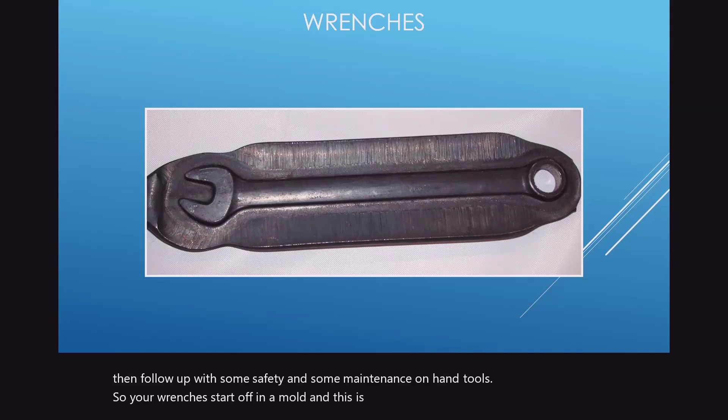So your wrenches start off in a mold, and this is a mold of a wrench right here. This wrench is not finished, it'll be going through the rest of the process, then it'll be chromed, and then it'll be sized and stamped in the size.

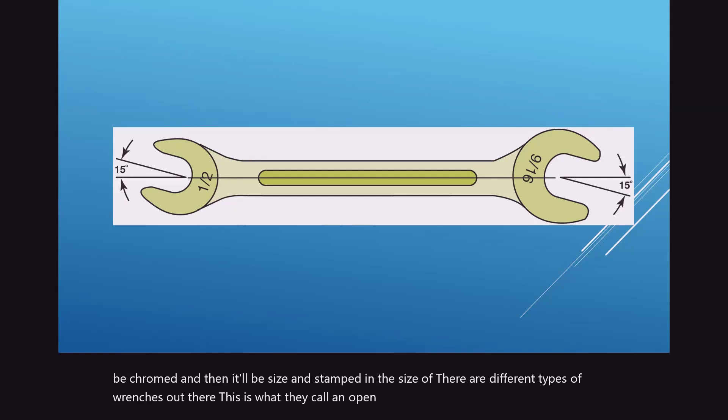There are different types of wrenches out there. This is what they call an open-end wrench. You'll notice it has a 15-degree angle to it. This angle makes it easier to actually fit on the bolt or the fastener, and then it gives a little bit more leverage for the technician.

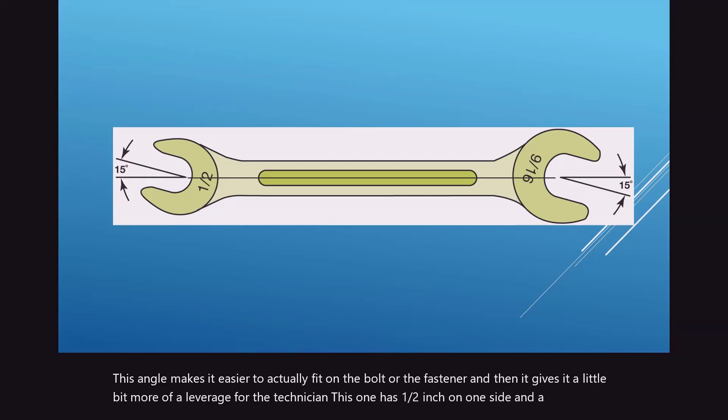This one has a 1/2 inch on one side and a 9/16 on the other side. This is very common on open-end wrenches, they'll have one size on one end and one size on the other.

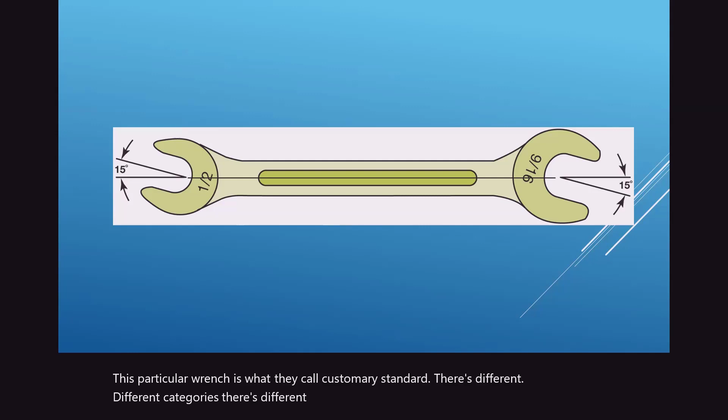Now, I do want to note that this particular wrench is what they call customary standard. There's different categories, there's different types of wrenches out there, and we could have metric or customary standard. There's some other different types of wrenches out there, different categories, but I won't go too deep into that because we're really going to focus on the automotive world.

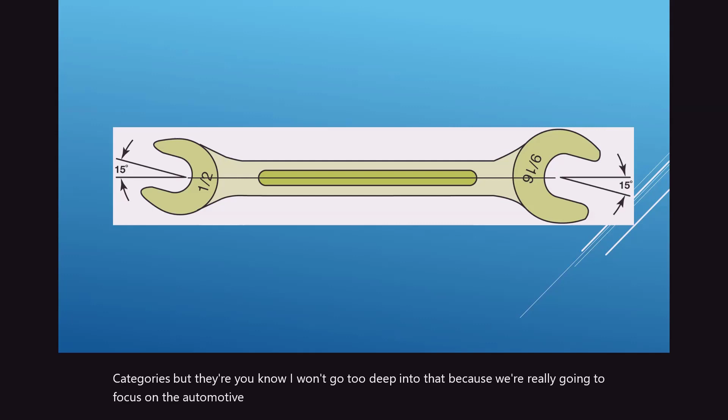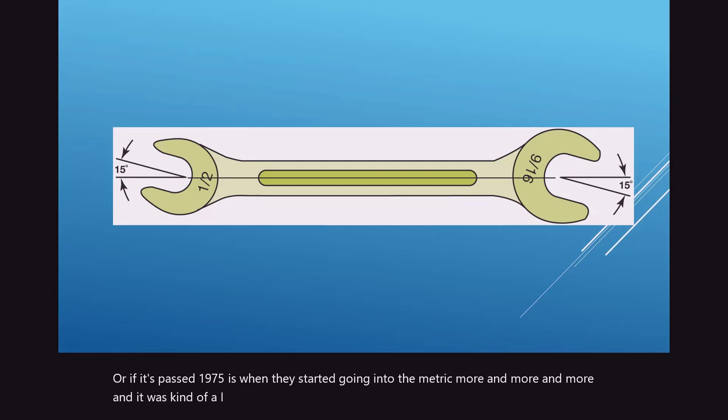And you'll find that most automotive pre-1975 is going to be in US customary standard, or if it's past 1975 is when they started going into the metric more and more. It wasn't so much a phase in, my toolbox actually has both in them, and you'll find some of the kits come with both sizes in them also.

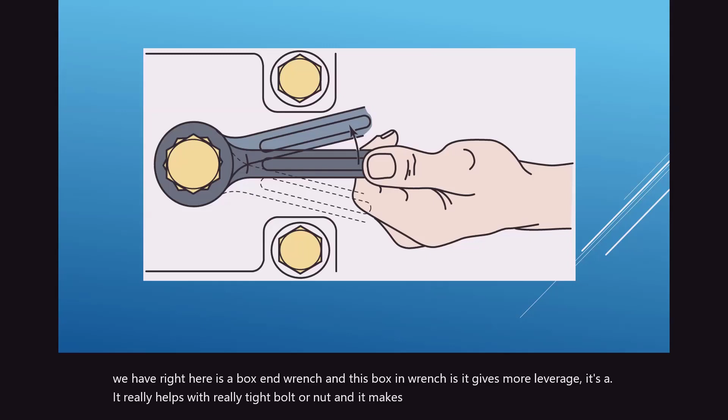But this is an open-end wrench. What we have right here is a box-end wrench, and this box-end wrench gives more leverage. It really helps with a really tight bolt or nut, and makes it easier for you to give a little bit of leverage on it too.

And like I said, this is a box-end, and then there's what they call a combination wrench. The combination wrench is very common, let's put it that way. You buy your kits with different sizes, and generally they'll have a box-end on one side and an open-end on the other side, and these will match in sizes. The open end will be like a 1/2 inch, and the box end will be a 1/2 inch.

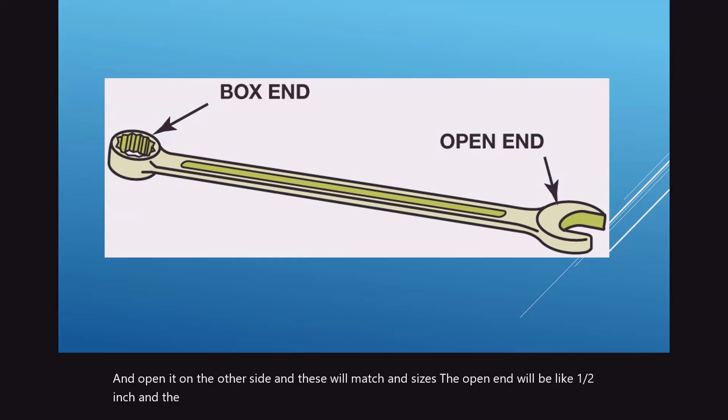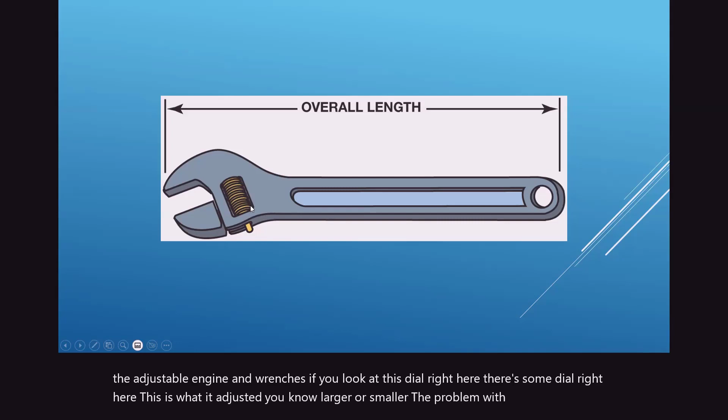Then you have your adjustable wrenches. The adjustable wrench is not really what I use that often, because if you look at this dial right here, this thumb dial, this is what adjusts it larger or smaller. The problem with adjustable wrenches is they can actually slip, and they can round over your different types of fasteners if you're trying to use them.

Generally, the only time I really use adjustable wrenches is when I gotta bend a piece of sheet metal, I'll use it that way. And that's pretty much most of what I use it for.

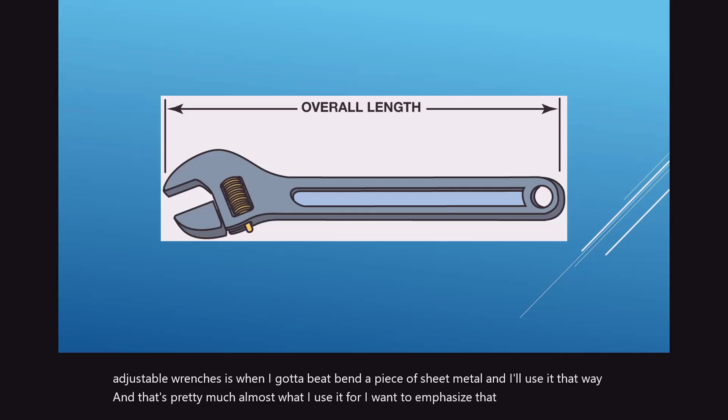I want to emphasize that you need to get the right type of tool for the work. If you try to shortcut, or try to adapt a tool to a job it's not meant for, this is going to either damage the work or the project you have, or it could actually get yourself hurt. So just be very careful when you're sizing up the tool for the work.

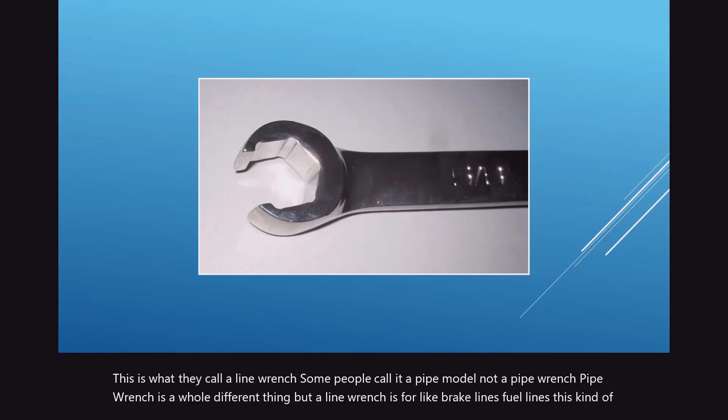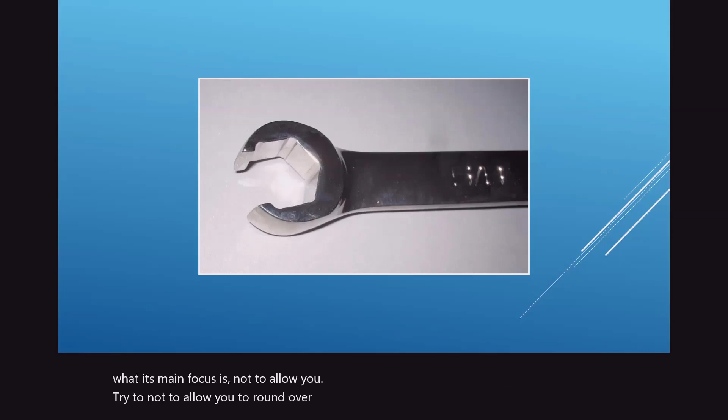This is what they call a line wrench. Some people call it a pipe wrench, well, not a pipe wrench - that's a whole different thing. A line wrench is for brake lines, fuel lines, power steering lines, this kind of stuff where you have a tubing fitting going into a connector, and you want to put a lot of force onto it, but you don't want to round it over. So that's its main focus, not to allow you to round over that fitting. So this is what they call a line wrench.

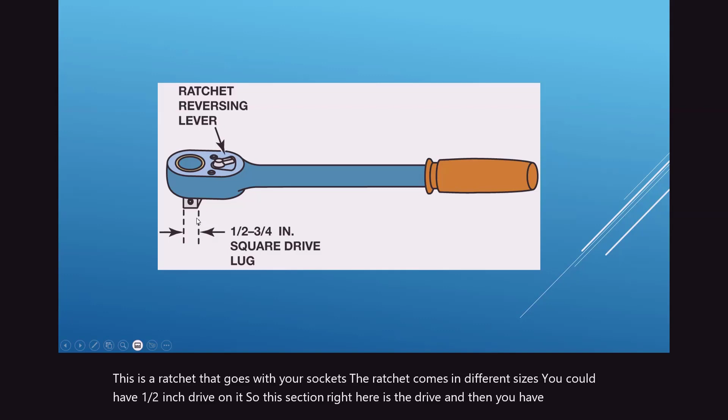This is a ratchet that goes with your sockets. The ratchet comes in different sizes - you could have a 1/2 inch drive on it. So this section right here is the drive, and then you have the socket that connects to it, and the socket will have different output sizes on it too.

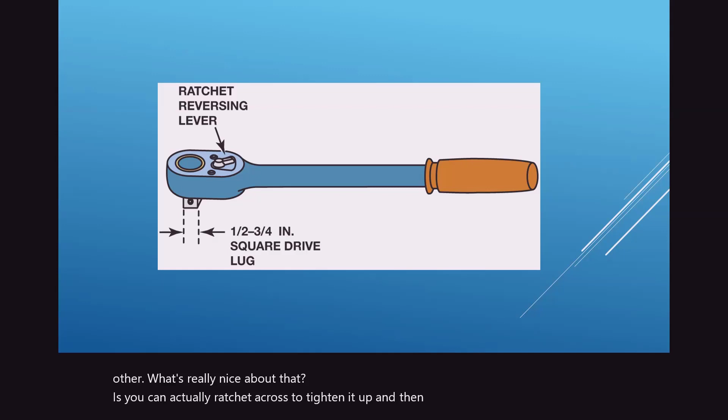This ratchet is directional, so you can change it to where it goes in one direction or the other. What's really nice is you can ratchet it across to tighten it up, and get a little more, so it gives you a little bit of playroom to go through, and you don't have to change like you would a wrench - bring it up, put it in another direction, bring it up, go into another direction. So it makes it a lot nicer and convenient.

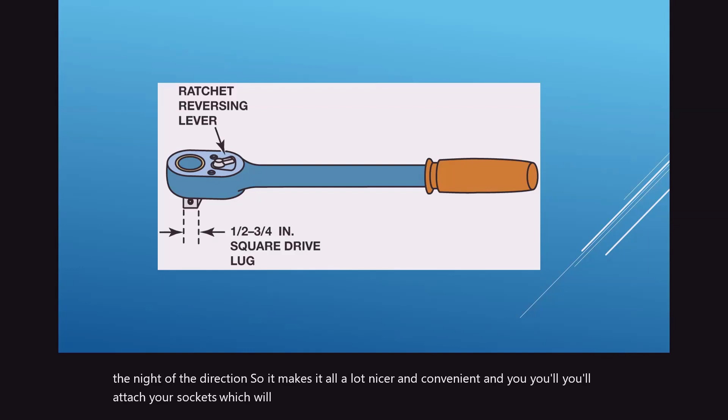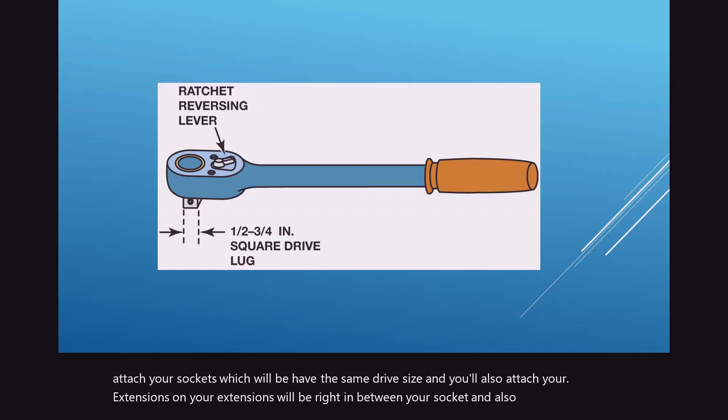You'll attach your sockets, which will have the same drive size, and you'll also attach your extensions. Your extensions will be right in between your socket and your drive of your ratchet. You could buy the extensions, and sometimes they come in kits with a couple different sizes. You can get really long extensions too - I have one that's almost as tall as I am, from when I was doing a lot of transmission work at one time.

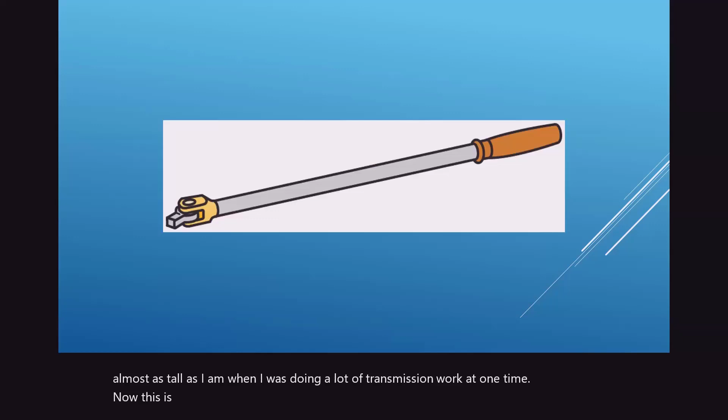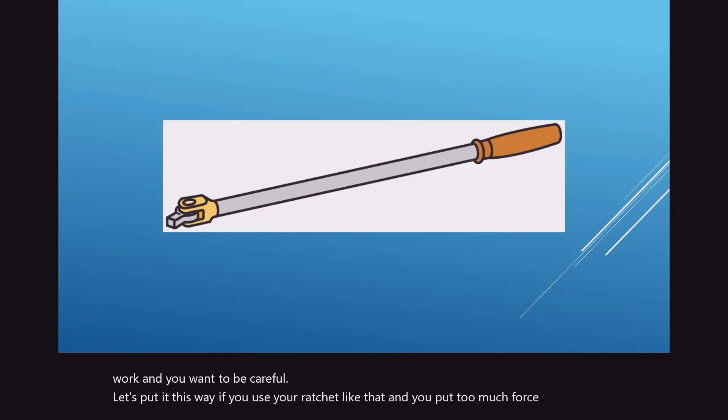Now, this is a flex bar, or sometimes we'll call it a breaker bar. This is really good for really tight work. You want to be careful - if you use your ratchet on something really tight and put too much force on it, you could damage the little gear inside the ratchet, and then you have to replace it or repair it. So it's best, when it's really, really tight, to get yourself a flex bar or breaker bar to do it that way.

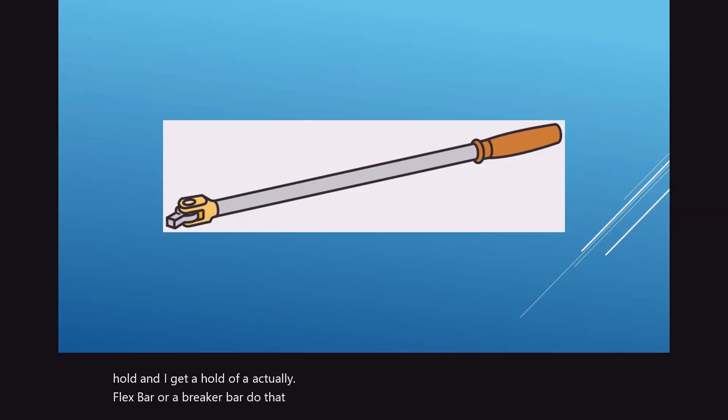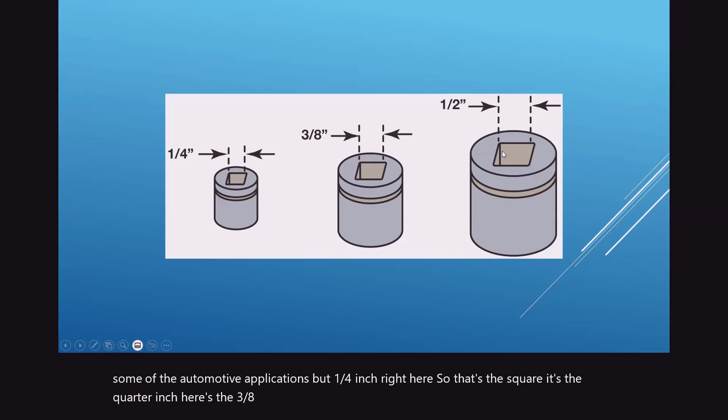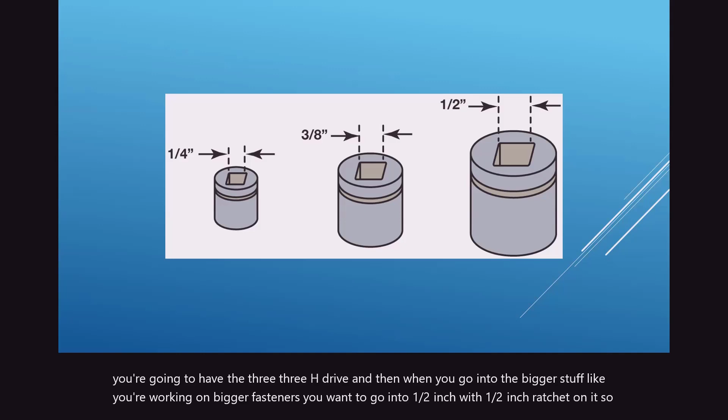There's different sizes of socket drives, and this is a good example. Some common sizes - they don't have the 3/4 here, which you might use on some automotive applications. But here's a 1/4 inch, the square drive, here's a 3/8, and here's a 1/2 inch. Your 1/4 inch is going to be for your lighter stuff. The most common, used for almost everything hand-wise, is the 3/8 drive. And when you get into bigger fasteners, you want to go with a 1/2 inch ratchet. So each size has its own little ratchet you could use.

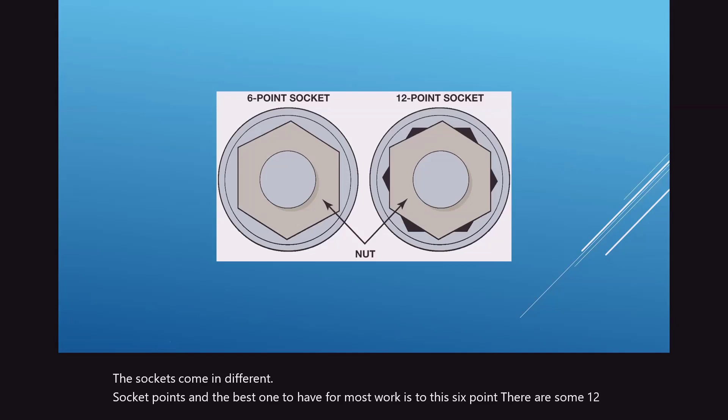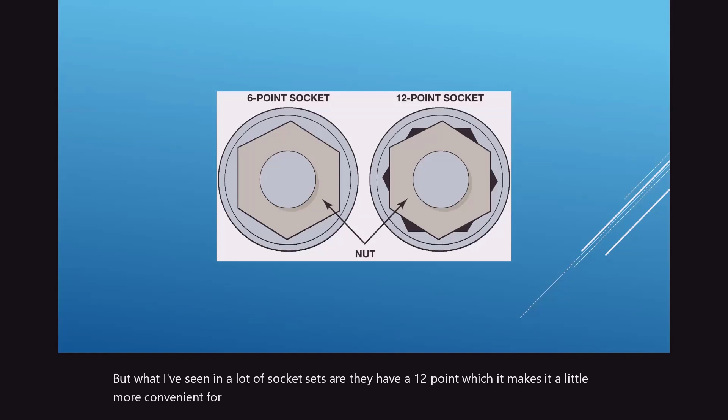The sockets come in different socket points, and the best one to have for most work is the 6 point. There are some 12 point applications - some exhaust manifold bolts, some intake manifold bolts, would require a 12 point. Most socket sets I've seen have a 12 point, which makes it more convenient for them to stamp out, whereas you almost have to go find the 6 point sockets. But if you have something really tight, be careful using a 12 point socket, because it can possibly round over. If you get a little wear on that bolt or nut, it may round it over when you put a lot of pressure on it. So just be careful with it.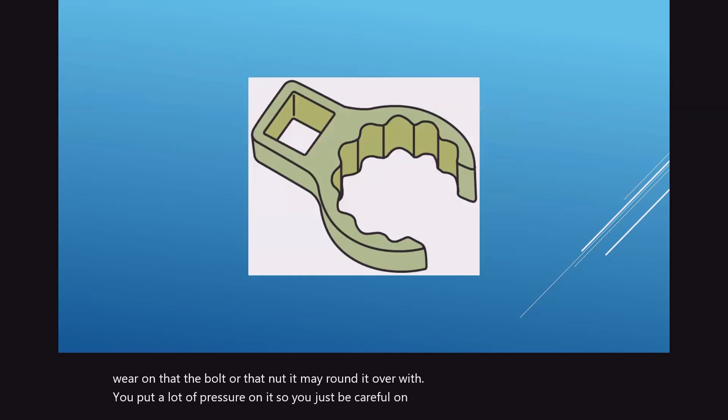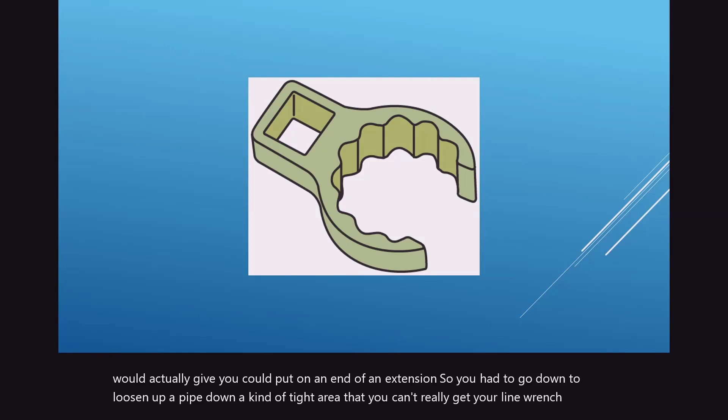And then there's also the crow's foot. This is similar to your line wrench, but it can actually be put on the end of an extension. Say you had to go down to loosen up a pipe in a tight area that you can't really get your line wrench into - you can take your crow's foot with a long extension and go down and loosen it up that way. So that's another possibility too.

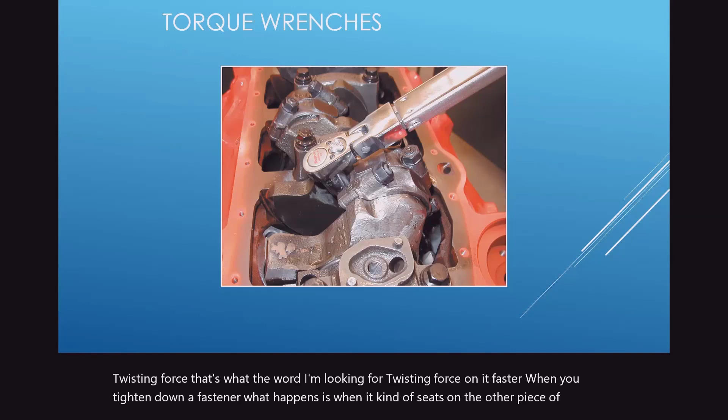Now, on torque wrenches - these are the devices you're actually going to use to make sure the fastener has enough torque, which sounds funny, but it means enough twisting force on a fastener. When you tighten down a fastener, what happens is it seats on the other piece of work - you're pushing things together and holding things together, putting friction force on the surface, and you're stretching the threads on that bolt or stud to give it enough tension that it's going to stay in place.

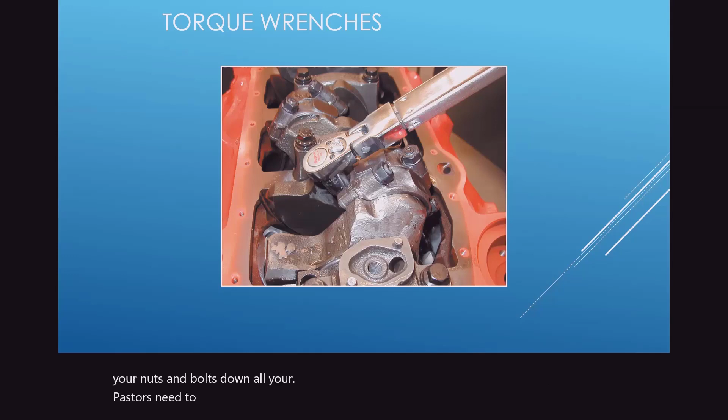If you use a ratchet just to tighten it down that way, you really don't know how much force you have on it, how much torque. So you need to get accustomed to using a torque wrench to actually tighten all your nuts and bolts down. All your fasteners need to be torqued down.

There's a torque for every fastener on a vehicle, engine-wise and all. There are different types of torque wrenches: the clicker type, which is in the picture you have right here, a beam type, and also a dial type. I don't have a picture right now of an actual digital type one.

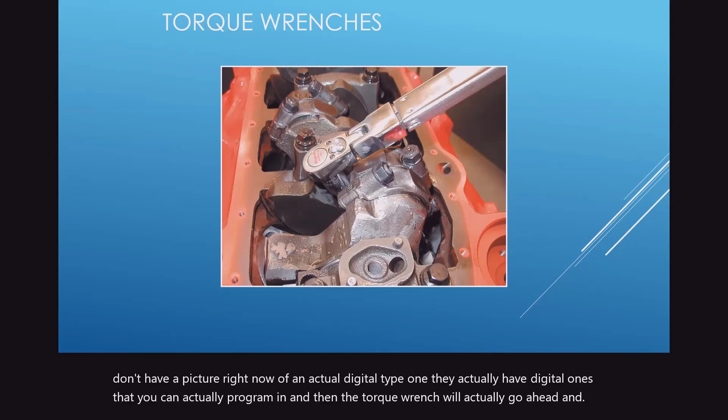They actually have digital ones that you can program in, and then the torque wrench will vibrate and beep at you when you get to that force, which is really nice when you're getting to some areas that you can't really see that well. But you want to be very careful when using a torque wrench, because there's some care you need to do with it. The way the clicker type works is there's either a flip lever or a lock to where you'll unlock the torque wrench, and then you'll dial it down to the specified torque you want. The torque can be in foot-pounds or pound-feet, or it could be in metric measurements too.

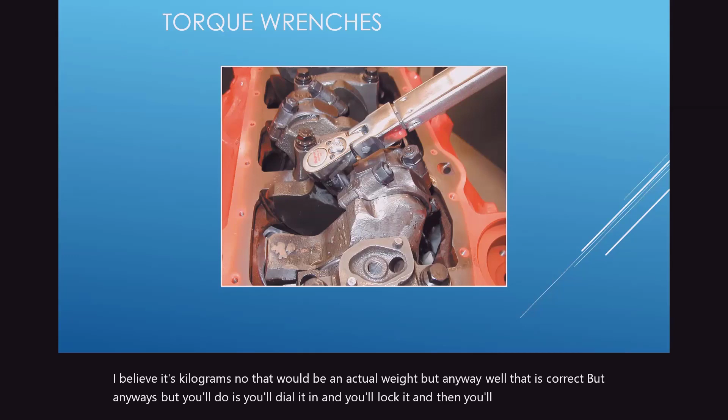So you've got the two sides. A lot of torque wrenches will have both on it, one side is the standard, and the other is in meters, or I believe it's kilograms. No, that would be an actual weight, but anyway, that is correct. What you'll do is dial it in and lock it, then run it down to that specific torque, and it's going to click. When it clicks, that means I'm at that actual twisting force and I'm good to go. You'll go around through all your nuts and bolts as you do it that way too.

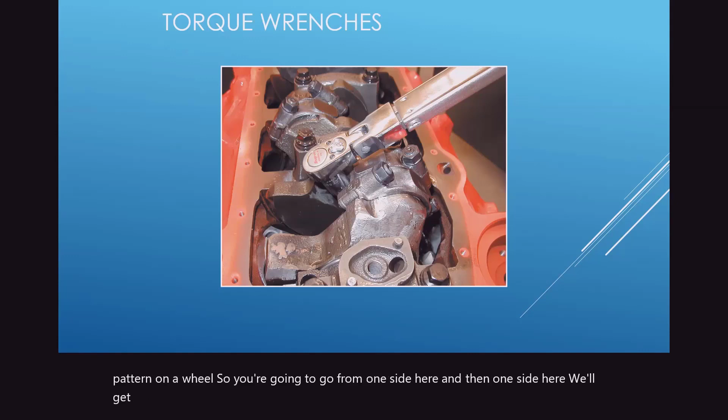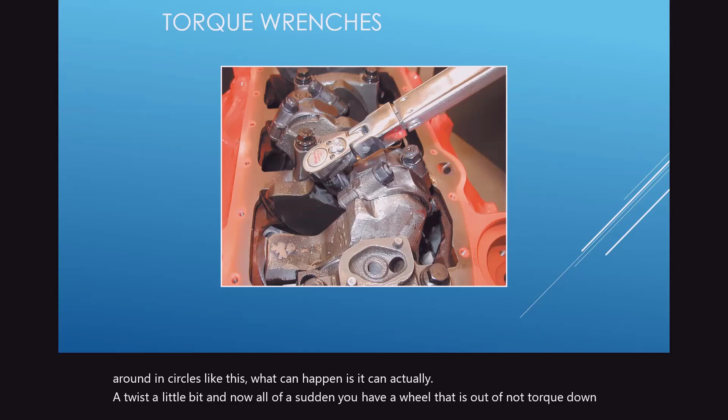Now, if you're torquing down a wheel on a car, or head bolts, or any kind of bolts you're going to be torquing down, you want to make this a habit: go in a crisscross pattern. So you're going to go from one side here, then one side here - we'll get more into this when we go into wheels and tires - but you want to go across, cross, cross that way, so it pulls down the wheel nice and straight. If you just go all the way around in circles, what can happen is it can actually twist a little bit, and now you have a wheel that's not torqued down evenly, and there's all kinds of nasty things that could happen - it could possibly have the wheel come off.

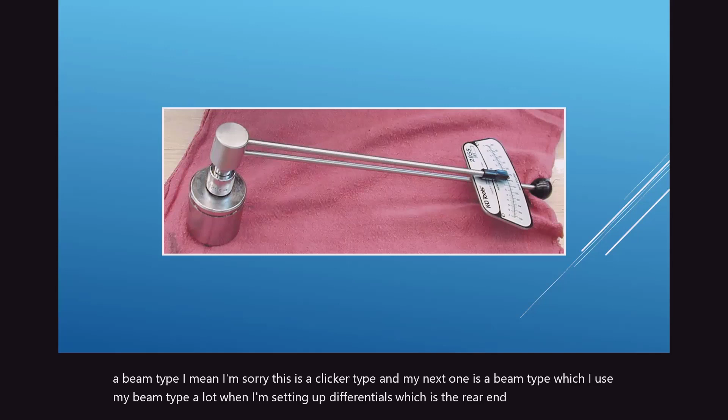So yeah, this is a beam type, this is a clicker type, and my next one is a beam type, which I use a lot when I'm setting up differentials, which is the rear end, the drive end of the actual differential. I use this beam type because it's very, very sensitive. When you start pulling on the handle on the end here, this starts to flex, so it actually shows you what your torque is, and it's very, very sensitive. This is what I normally use when I'm doing that.

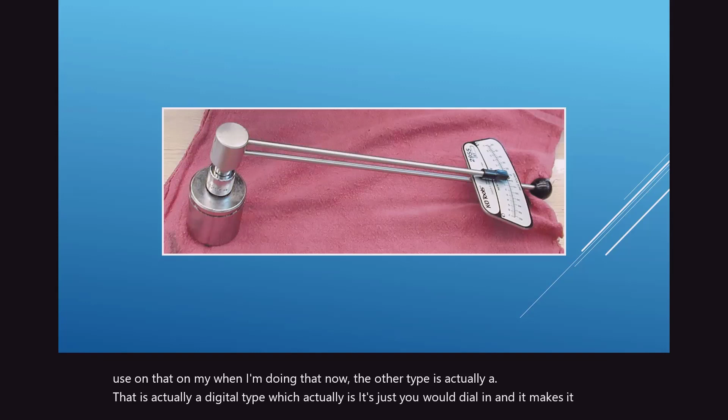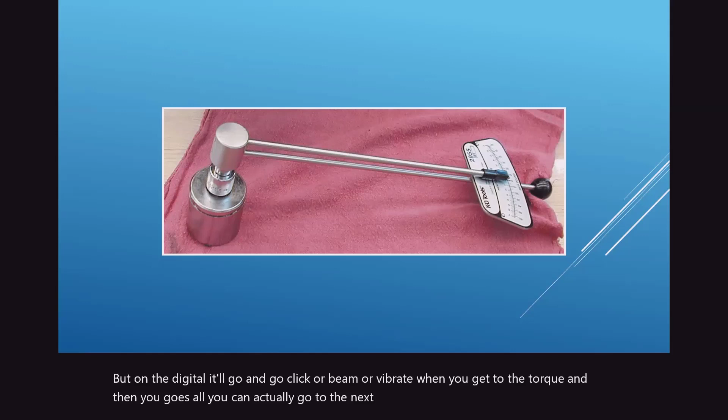Now, the other type is actually a digital type, which you would just dial in, and it makes it really nice. Like I said before, sometimes on some sequence of torquing things down, they'll say torque it down to 45 foot-pounds and then add 60 degrees. Unless you have a degree wheel with it too, that's kind of hard to do. But on the digital, it'll click or beam or vibrate when you get to the torque, and then you can go to the next stage of torquing it down to the degree. So it makes it kind of nice that it's all in one type thing.

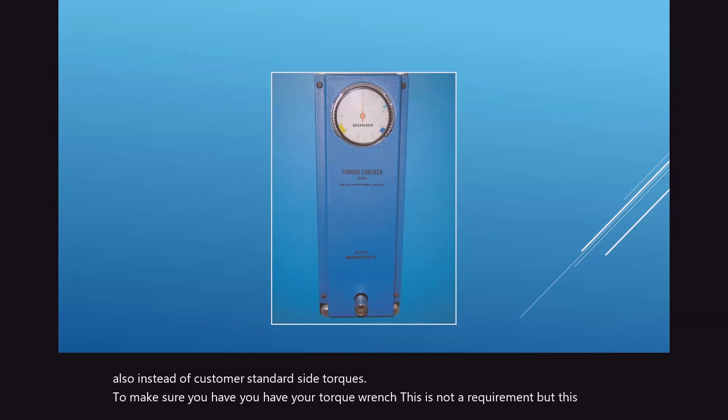And again, those will come in metric and also in customary standard side torques. To make sure you have your torque wrench - this is not a requirement, but this is how we can check to see if the torque of my wrench is accurate. After a period of time, torque wrenches can come out of accuracy, and what you'll either do is, if you have one of these torque checkers, you can actually check it. But when it comes to repair, a lot of times we have to send them in.

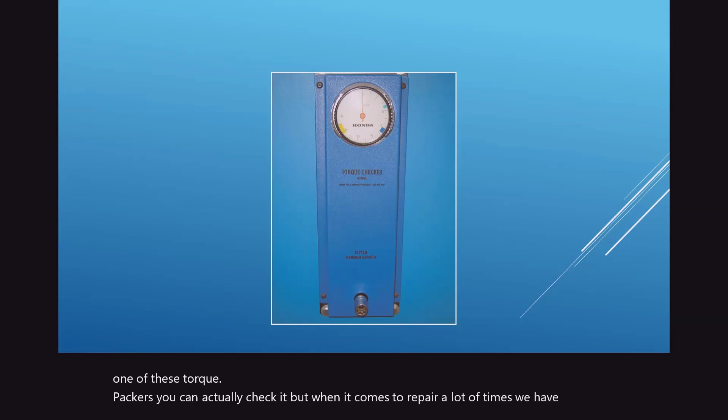My recommendation is don't get the torque checker, or if you do, have it bolted up on a wall someplace so every once in a while you can go by and check the torque on your wrench. And then if it's out of torque, you can send it in to have it repaired.

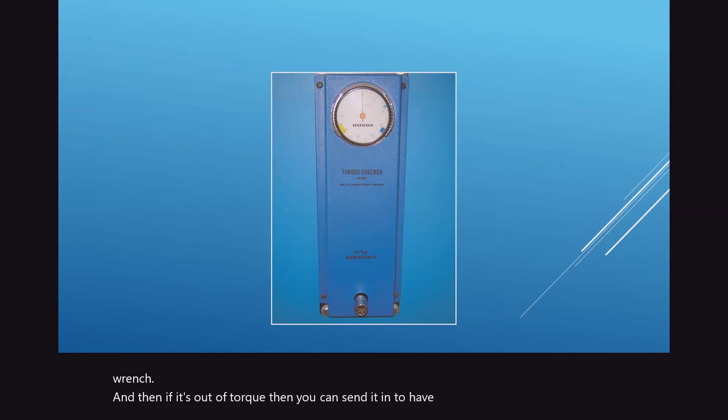A lot of your tool manufacturers will do it, and there are different areas you can actually send in equipment to have it checked or repaired, and checked and repaired to make sure you keep it up to date.

It really depends on how often you use your torque wrench, but my recommendation is to make sure you send it in like once a year. You may want to send it earlier if you use it a lot. You may not, but I would still say a minimum of once a year.

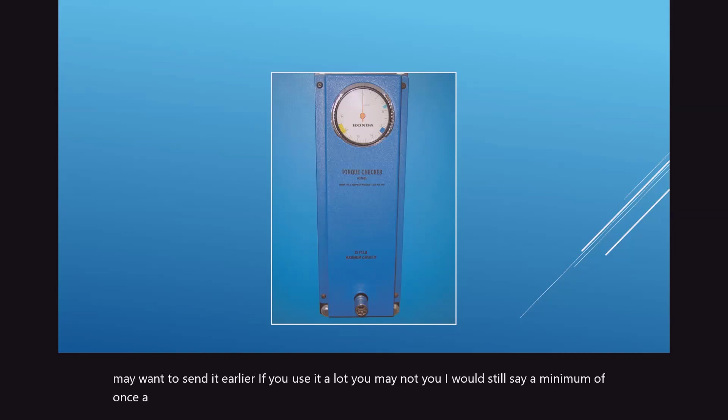The other thing I wanted to point out about torque wrenches is you want to make sure you put them in a rest position. I even do it on the digital ones too. But when you're through using the torque wrench, like on your clicker type, and sometimes they call them dial types too, you want to make sure you bring everything down to the 0 mark.

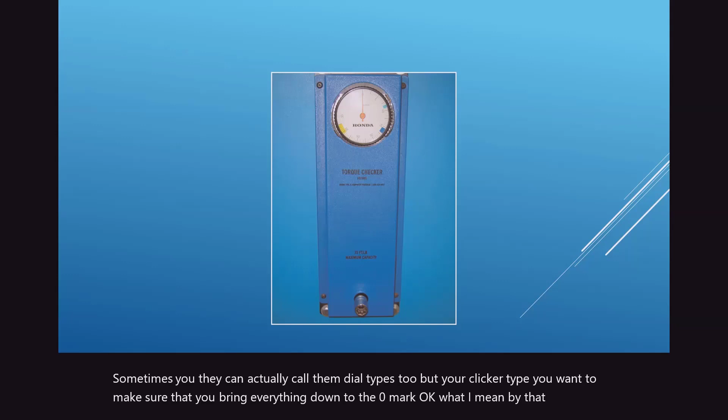What I mean is, on your clicker type, you're going to dial them into a torque setting and lock it in place, and then do your torquing. Well, after you're done torquing things down, take the time to unlock it and bring it back down to 0 again, or as close to 0 as you can.

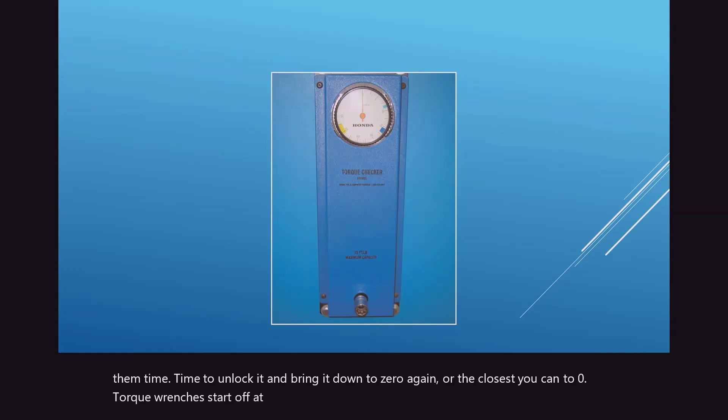Some torque wrenches start off at like 25 foot-pounds. If you get into the inch-pound ones too, because they have those out there as well, you want to also bring them down to as close to 0 as possible.

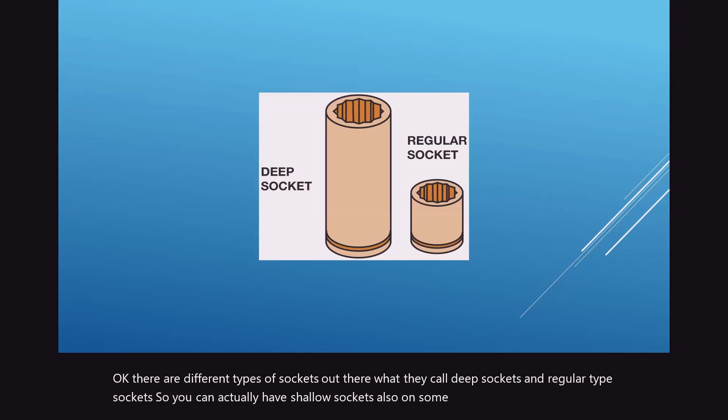There are different types of sockets out there—what they call deep sockets and regular type sockets. You can also have shallow sockets. Some tool manufacturers will sell all kinds of different depths of sockets, and depending on what kind of work you're doing, if you need to get down into a threaded area where the nut is all the way down inside, you may have to have a deeper socket to get it out.

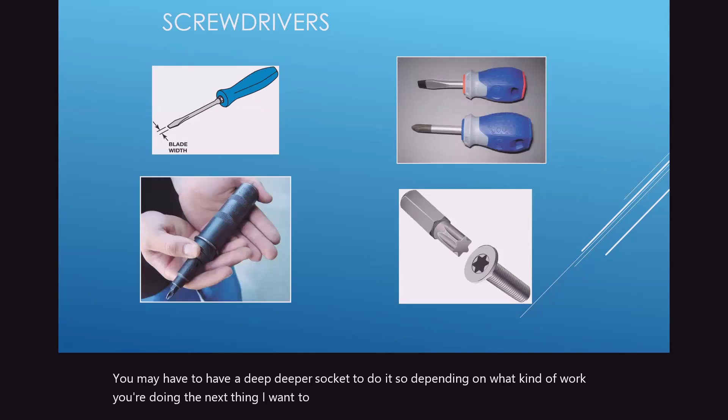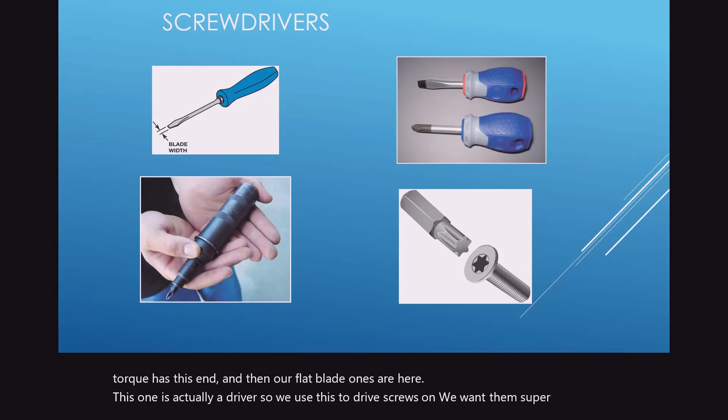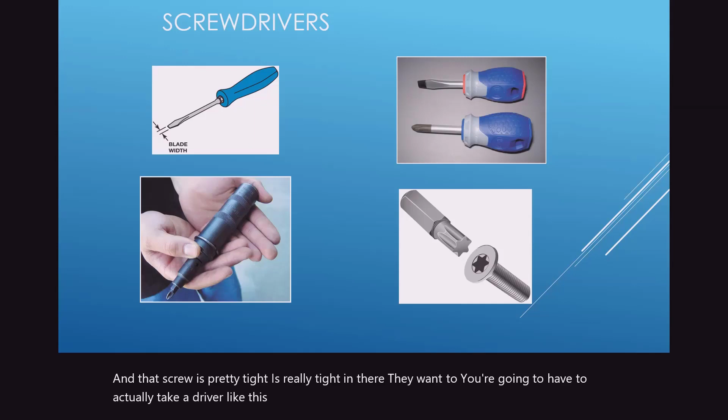We use this to drive screws when we want them super tight and can't do it with our hands, or we may use the driver to loosen some of your drum brake systems. They had a set screw from the factory to keep it in place during assembly, and that screw is pretty tight—really tight in there. You're going to have to use a driver like this because you may not have enough twisting force in your wrist to bring it out.

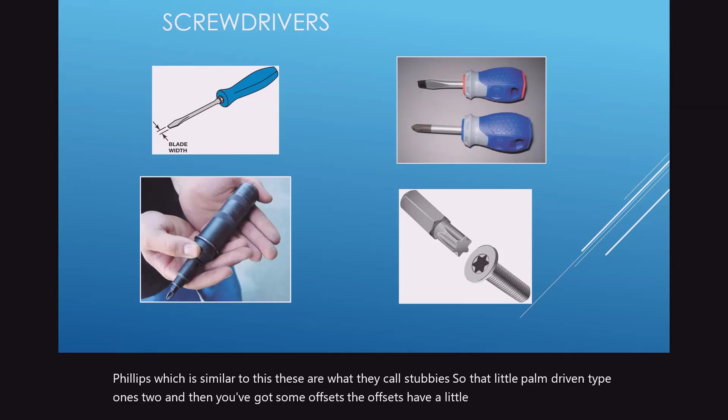But these are some of the most common ones—your flats, your Phillips, which is similar to this. These are what they call stubbies, a little palm-driven type too. And then you've got some offsets. The offsets have a bit of an angle to them so you can get into really tight spots. And then, of course, our torx.

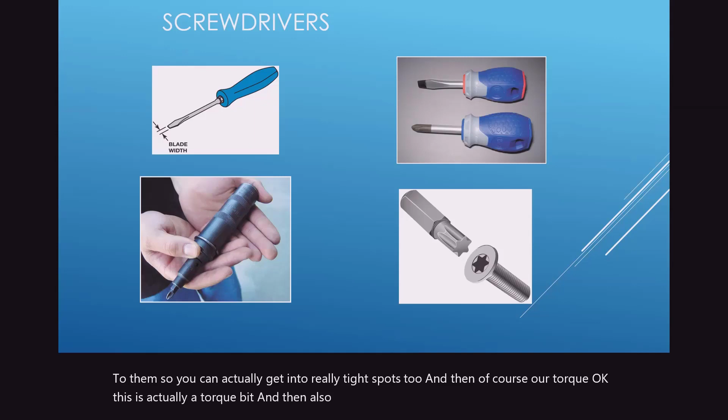This is actually a torx bit, and then also our impact. The torx can come in different sizes, and they call them like T45s, T25s, and so on to get into the size that they need.

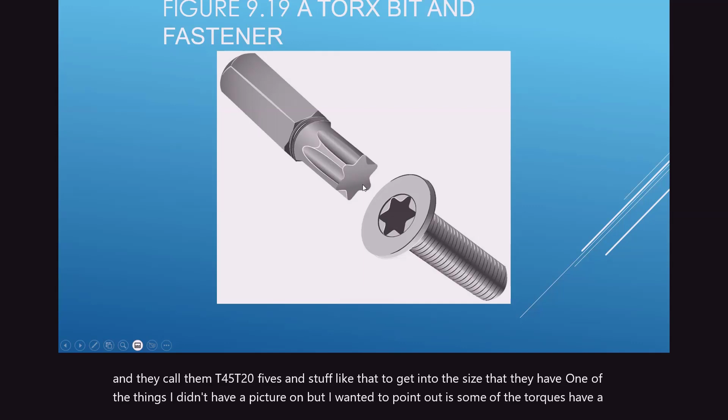One thing I didn't have a picture of but wanted to point out is that some of the torx bits have a hole in the center—these are considered security torx. Early on, it wasn't as available to the general public; they would only sell them to certain people. Now it's pretty much standard that most technicians will have them.

When you're through with that project, just take your time to wipe it down, maybe with a little bit of cleaning solution to make sure it stays nice and greaseless like that.

And then we have our mallets. These are great for a kind of soft installation, you don't want to damage anything very much. There's also brass hammers out there. Brass hammers are good for metals that are soft, and you don't want to damage the metal too much.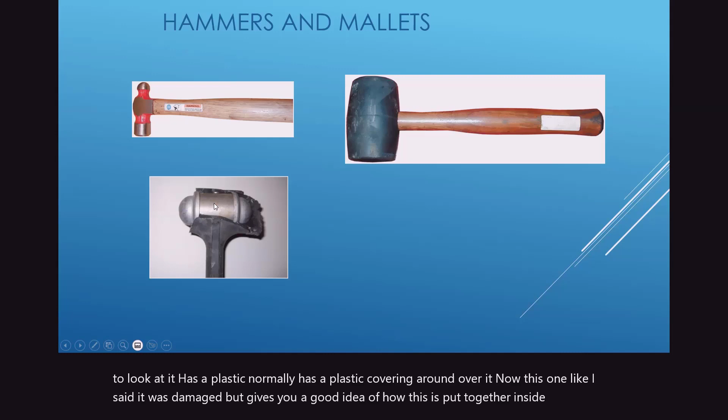Inside here is shot, like little ball bearings, and this is actually in there on purpose. So on a regular hammer, when you hit something metal, it will actually bounce a little bit. With the dead blow hammer, that shot migrates over to the spot you're actually driving to, which keeps it from bouncing as much. So that's why they call it a dead blow hammer.

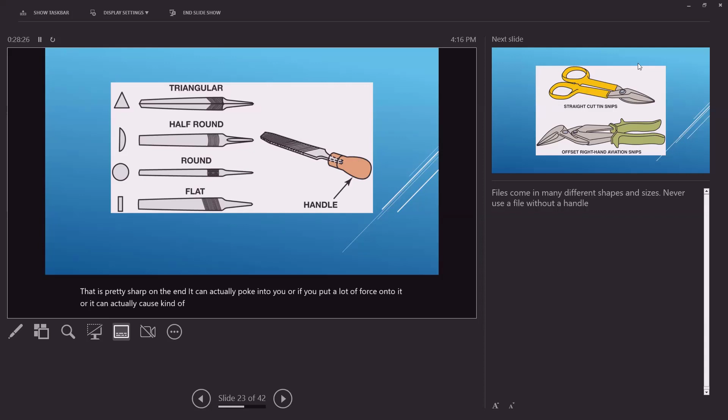The other one I wanted to get into is cutters, different types of cutters. These are what they call tin snips. They cut different thin tin or thin metals, or they may be called aviation snips. They can have a right hand, a left hand, or a center aviation snips. So we have different types for doing different kinds of cutting work.

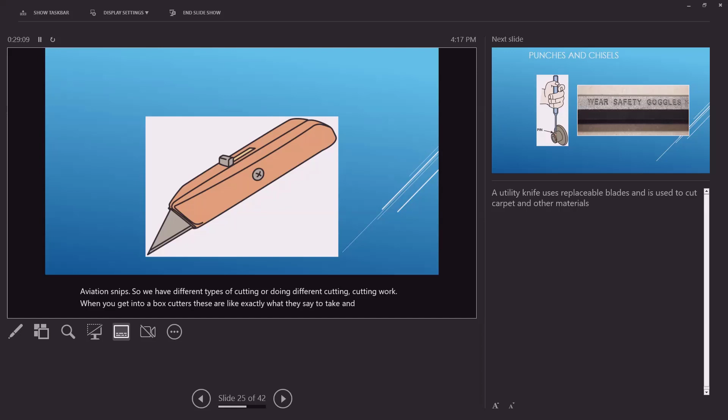When you get into box cutters, these are exactly what they say they are, used to cut boxes. A lot of people use them for cutting carpet or opening a package. Sometimes they're called utility knives. They have replaceable blades, but again, they're only used for light type work.

Your punches and chisels - this is showing an actual punch right here, and we're driving a pin out. You can use one to drive a pin in or out. You also have chisels to actually cut a piece of work. It looks similar to a punch, but has a kind of blade on the end, so you can drive out certain things or cut certain things off.

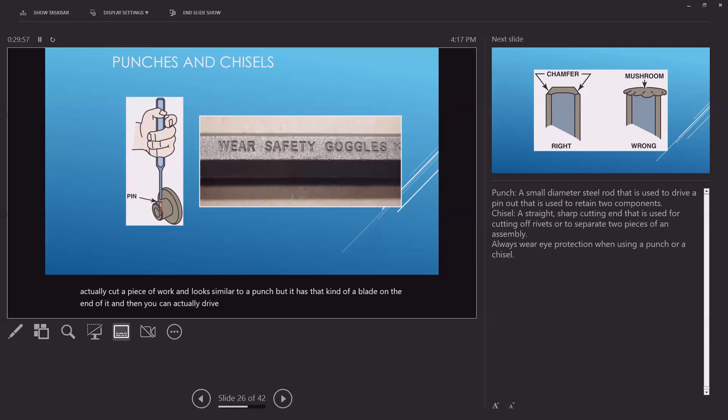The one thing I wanted to bring to your attention is that after a period of time with a punch or chisel, the actual top of it is going to start mushrooming over. It's just a matter of time when it does that. You want to always wear safety glasses when using punches, chisels, and all your tools. What can happen is it mushrooms over and you need to clean up the chamfer on it - in other words, get it back to the angle. Some of your chisels and punches come with a little gauge so you know exactly what angle is best for that punch or chisel.

Then there's also stud removers - this is a stud remover right here, one style. There are other styles that grip a different way, but you can put it on an extension or your ratchet, and this little piece here goes in and grips onto that stud so you can pull the stud out. So you just put it down the hole, and when you start twisting, it starts pulling and locks in place so you can pull that stud out.

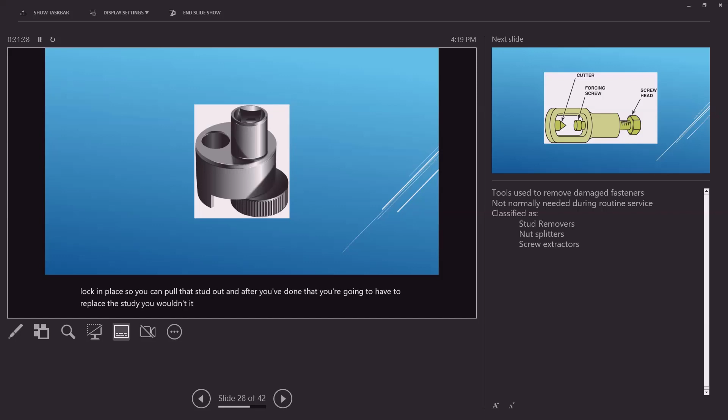After you've done that, you're going to have to replace the stud. It wouldn't be smart to use that stud over again.

All right, and then we have nut splitters - this is a nut splitter. Basically what you're going to do is put it up against the nut, usually because the nut's rounded over and you can't get a good grip on it. So you actually set up this tool so it tightens down to where it splits the nut itself.

The other tool I want to bring up is extractors. This is one style - there are other styles out there, but this one is pretty common. Basically, when you get to the point where that stud has been broken off, maybe even flush or under flush, you're going to have to drill - this takes a lot of skill - you drill center into the actual stud, and then use one of these extractors. You drive the extractor in, and it has a twist to it, so it twists its way out. There's a special tool that goes right on top here that connects so you can get it out fairly easily. It's just a matter of how bad that is.

You may end up having to drill it out and retapping - in other words, cutting new threads on the actual piece of work you're working on.

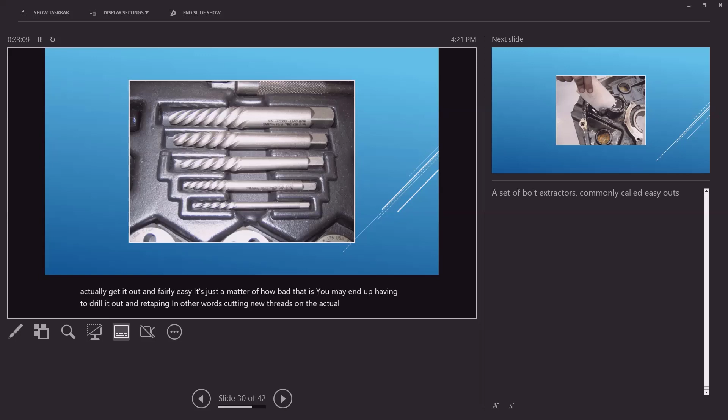Hopefully not. And then, of course, when you're looking at engines, you actually have some plugs that go into what are called casting plugs. Some people call them freeze plug holes, but they're actually casting plugs. Whenever they cast a block, there has to be a place to get the sand out, so there will be sand in different sections to make sure it has all the channels it needs.

So these are actually coolant passages right here. There's also a place for the camshaft on the backside of some block camshafts. This is one that's pretty common, and what they've done here is take some wax and mold it over to help seal that. I myself tend to use Permatex and seal it that way, but either way works fine for what you're doing.

And then, of course, the actual casting plug holes - you're going to use an actual casting plug, sometimes called a freeze plug, that you're going to use.

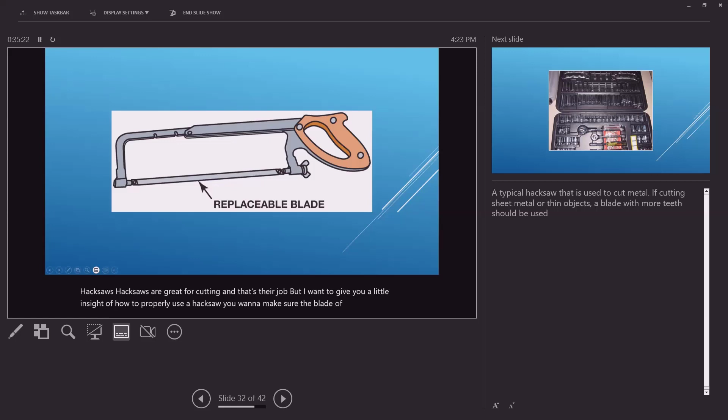Hacksaws are great for cutting, and that's their job, but I want to give you a little insight on how to properly use one. Make sure the blade teeth are directed into the downward motion. When cutting, put force as you go down and lift the force as you come back. Don't put force in both directions, because you'll overheat the blade and the teeth will start flaking off, and you'll have to keep replacing the blades. Take care as you go down and slowly cut through the piece of work.

This is a tool kit, and hand tool kits are available out there from different manufacturers. I'll be posting some tool kits that I think you should have as the weeks go along. I might even put it down in the bottom of this video to help you get started.

When buying hand tools, I recommend that you start off small and build up. You can buy some of these kits pretty inexpensively, like the one in front of me, because it comes with ratchets, drivers, and other general purpose stuff. Later on, when you start making money, you can step up and maybe keep these at home and use better ones. Start off using this, then as you make money, you can really invest in the tools.

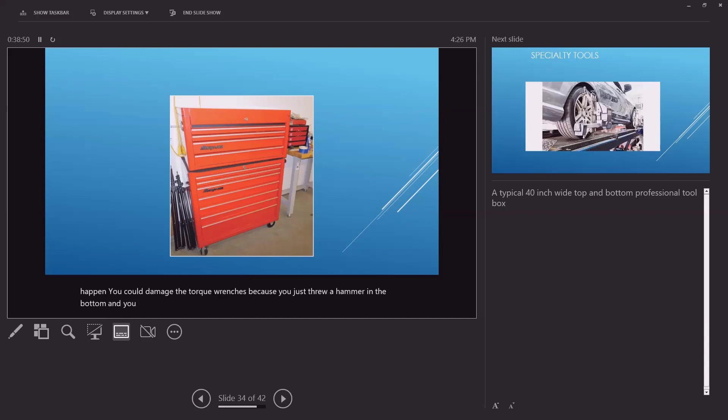Always make sure you keep the tools clean as you put them back in. If you get a little oil inside, hopefully the toolbox comes with liners, which makes it easier. I recommend keeping your heavier tools, like hammers, in the bottom drawers, and putting lighter stuff as you go up. Also make sure your torque wrenches aren't sitting with your hammers, you could damage the torque wrench if a hammer gets thrown against it, and torque wrenches tend to be more expensive than regular wrenches and ratchets.

Getting into specialty tools, there are different types. Really this next one should be a shop tool, not a specialty tool, this is more what a shop would provide. I wanted to give a preview before I do a video on alignment equipment and other stuff, I'm going to try to make videos on different types of equipment you might use in the shop.

There are different types of specialty tools you might want in your toolbox, like seal pullers and drivers, test lights, soldering guns, wire strippers, wire crimpers, and multimeters. When I get into my electrical section, I'm going to start showcasing some electrical tools too.

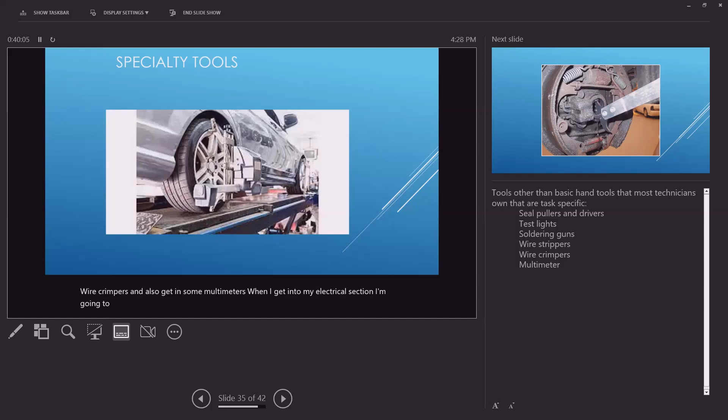Here is a seal remover. This is something you'd use if you're doing axle seals, a seal puller would be great. Anytime you pull a seal, you want to replace it, don't try to reuse it, because when you pull it you generally damage it and it's not going to seal like it should anymore.

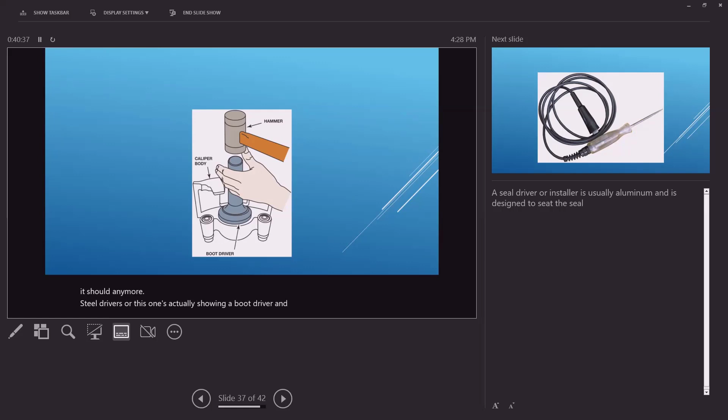Seal drivers, or this one's actually showing a boot driver, pretty same principle for seal drivers, but they can come in plastic or steel. This is actually for an actual disc brake caliper, and this is one style here also.

Here I have a test light, and test lights come in different sizes and types. This is an incandescent one, which you've got to be careful using when it comes to computer circuits, you can actually damage them. So there are special tools for getting into computers and stuff like that. These will only show you there's available voltage, it won't tell you how much. I'll get down to specialty tools as we go on to electrical too.

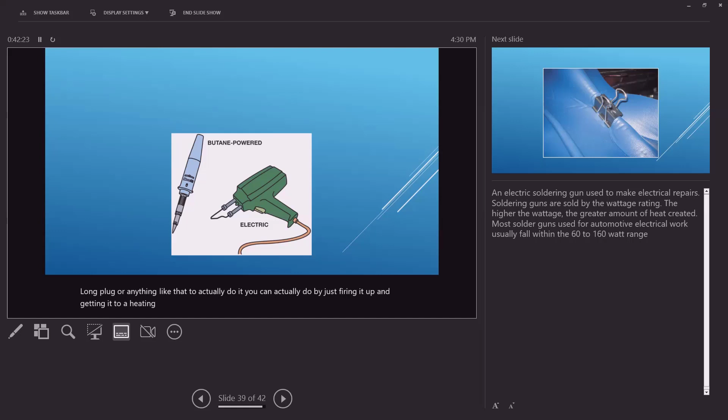And then of course you have, when you get into your soldering guns, there's different types. There's the electrical ones that you plug into the wall, I'm not a big fan of this. I'm more of a I use my soldering bench, which actually has a soldering iron, not a gun like you see here, this is a gun. My soldering iron is more of like this shape, but it's electrical too, and I can adjust the temperature to an exact range to keep that iron at. This is a butane one that you can actually use, really portable, and it makes it kind of nice when you don't have to drag out the long plug or anything to do it. This you can actually do by just firing it up and getting it to a heating temperature, and then do your soldering work.

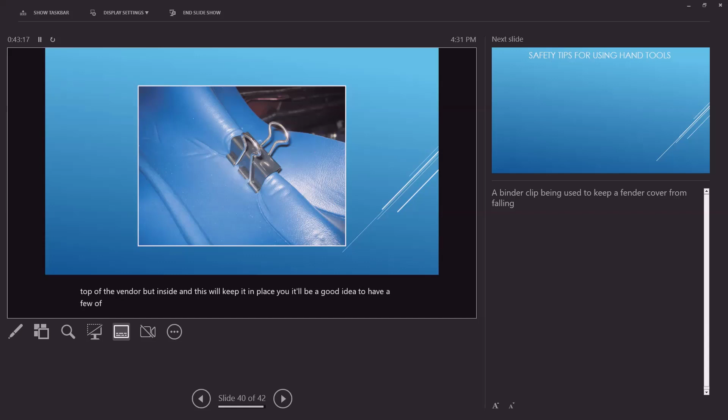One little tip that I didn't invent, but was introduced to me, which I thought was really great, is if you ever use fender covers, they tend to fall off, especially on cars that are really waxed up. A lot of times they have little pockets down in the bottom, and it gets a little bit crazy there, the fender covers fall off. This is a cool little trick somebody taught me some time ago, you can actually use a little binder clip and connect it to a metal edge on the fender. This won't be on the top of the fender, but inside, and this will keep it in place. It's a good idea to have a few of these in your toolbox to keep the fender covers on. And remember, always use fender covers.

All right, so a little bit of safety tips for using hand tools. Always pull the wrench towards yourself when you're breaking something loose or tightening it up, because if you slip off, you're just going to hit yourself. But if you're pushing it out, putting all kinds of force on it, and if you slip or it comes loose all of a sudden, there's some metal areas on the car, like on the fender, that really can cut you. You want to make sure you avoid that at all costs. So always remember to pull towards you when you're tightening, and pull towards you when you're trying to loosen up.

Keep your hand tools clean at all times. As you put the hand tools back in, even when you're using them, it's a good idea to have a rag to wipe them down a little bit, clean them up, put them back in your toolbox in an organized fashion. Try to use 6-point sockets as much as possible, especially when you're using a breaker bar to loosen up a fastener. Use the box end wrench for torquing and an open end wrench for speed stuff, in other words, to get it off a little bit faster. Always replace any tool that's damaged or worn, make sure you fix worn stuff like your ratchets, or if it's damaged, it's time to replace that. And if you get a good warranty on your tools, some of the higher end tool companies have warranty on certain tools, so you want to take advantage of that.